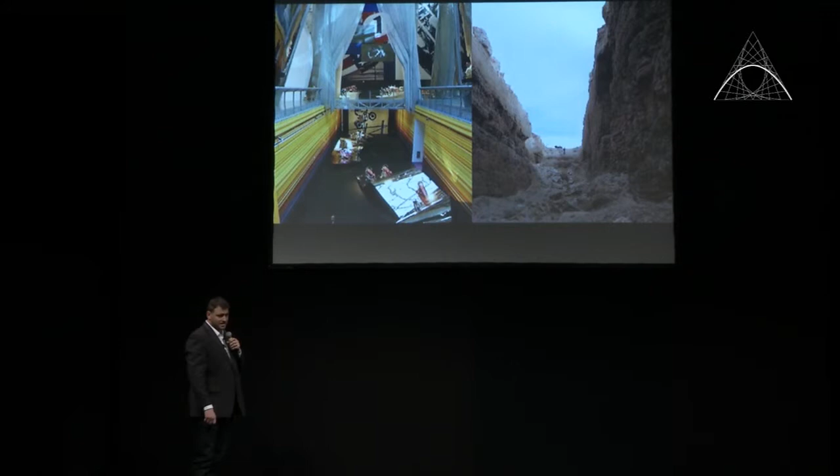We had the honor of having Rem Koolhaas design us the Guggenheim Museum in the Venetian, which shortly closed down. But here is also a land artist, Michael Heizer, that did Double Negative. Again, we look at these influences and how we can use them.

Bellagio, again, no concern for water, shows every day, every night. And yet you'll see our main body of water, Lake Mead, which has already dropped 120, 30 to 40 meters over the last 10 years.

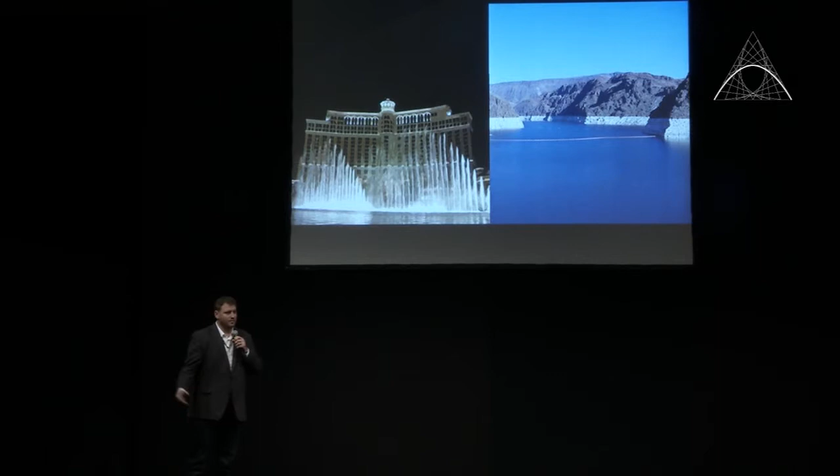Most think that the women are showgirls and that they do the entertainment, where we do have a beautiful family structure, schools, grocery stores, and all these other elements.

But the city is always about importing. And what we see is Caesar's Palace on my right, again, importing all these different elements, all these different cultures, and very rarely do we look at our own culture. Here are some hieroglyphics of Native Americans that have actually passed through here in Red Rocks and have depicted these images on the walls.

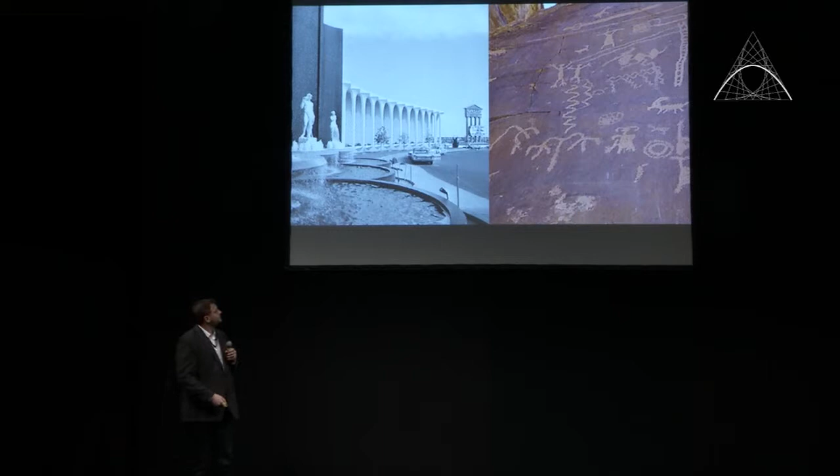So our goal at the firm is to look to that other side. What is it about our natural environment that we can use and find inspiration from?

So we take a look at a lot of the stuff that's in our surrounding context. The textures of our mountains. It's a very, very harsh environment. So even the plants we've looked at, they have these outer shells, these cactus, these barrel cactus. It's all about how to protect yourself from this hot desert sun.

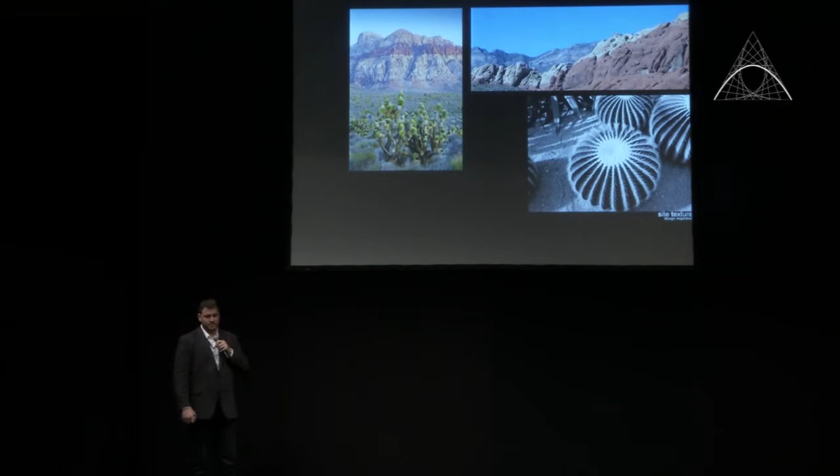And again, the bottom right image, so we're always trying to figure out how do we embrace and use both sides, the strip and our natural environment?

As you guys have known, we have St. Mark's Square in Las Vegas, we have New York, we have Paris, so we have all these different elements that we're always taking these images and bringing in. A couple years ago, we created a project called City Center, where we brought all the star architects around the world. And we still are trying to figure out if it's working.

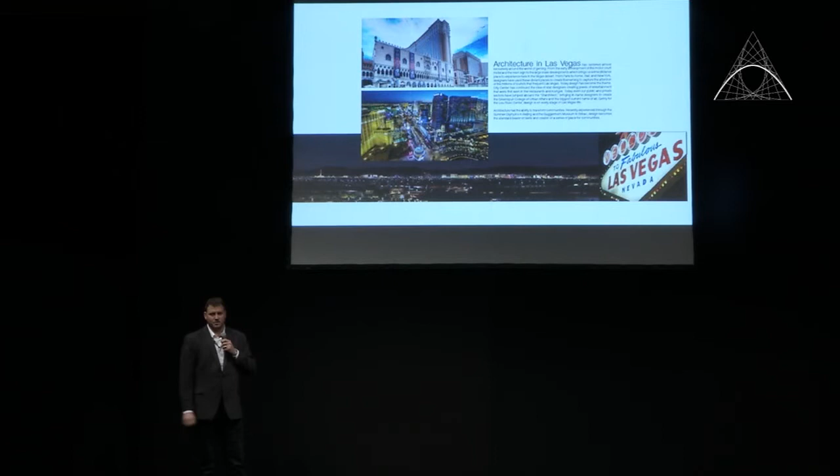But again, Las Vegas is trying to grow up. It's trying to find a design sense, and hopefully, over the years, it'll keep developing.

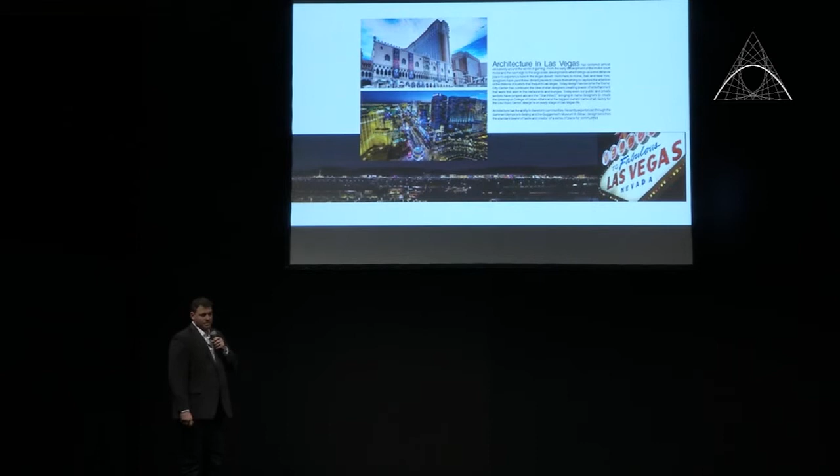But this is mostly what our housing looks like. Our firm does a lot of single-family residential, and to be quite honest, Las Vegas, this is what you get when you go through the valley. It is very depressing. The urban design is pretty poorly thought out. There's no walkability. It's all about the car. It's all about driving. And there's nothing unique about it.

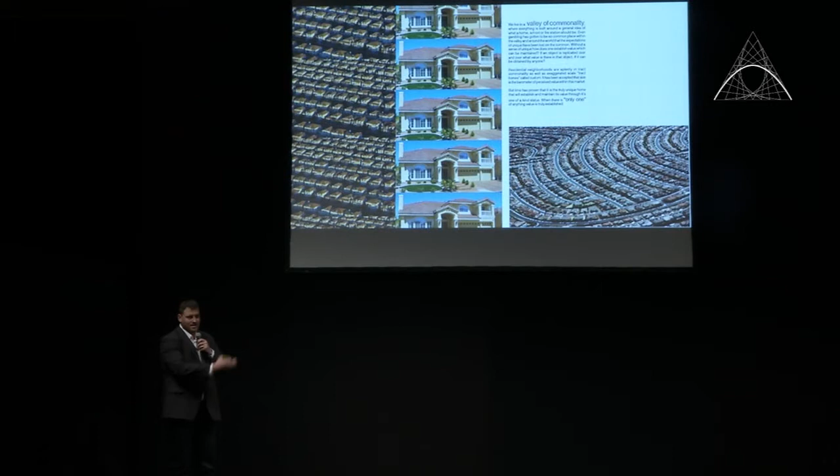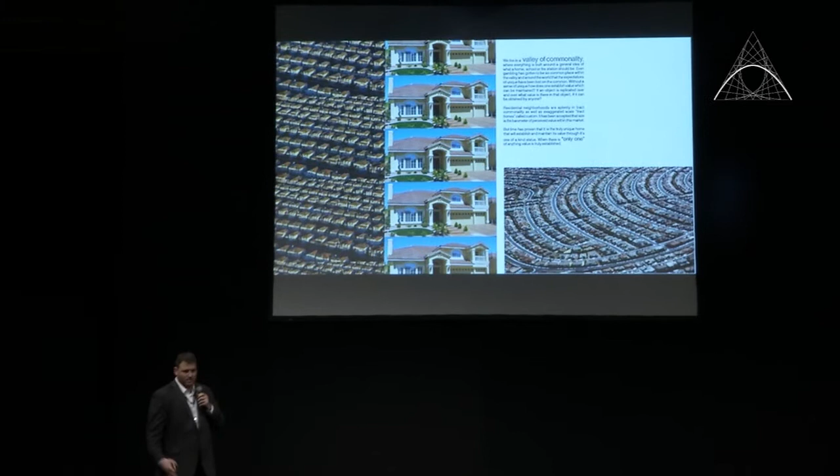And again, this is Tuscan style that, again, what did it have to do with our place? Nothing. But we would continually import all these different ideas without really knowing what they do and what they mean to our environment. So, Tresarca.

This was our first attempt to really start educating what we thought we could educate our city with, and looking at sustainable strategies on what you could do for a single-family house and how we could start to protect passive cooling systems, all these elements to really start educating our clients, our community on ideas.

So it was a very minimalist approach, and Tresarca is derived from tres, 3, and arca, which is Latin for box, safekeeping of a box. So what this project is, it's 3 separate boxes with the main second floor, which is all the bedrooms, elevated and then wrapped with a mesh.

Here in Europe, you've seen a lot of the double skins. This is something new to the States that it's starting to happen a lot more, but something we implemented on this project.

Again, site textures. These are the dry lake beds, 20 miles from the site. The textures of our Red Rock Mountains. And again, we started looking at this patchwork and how these could start to relate and become something that could be fabricated for these panels.

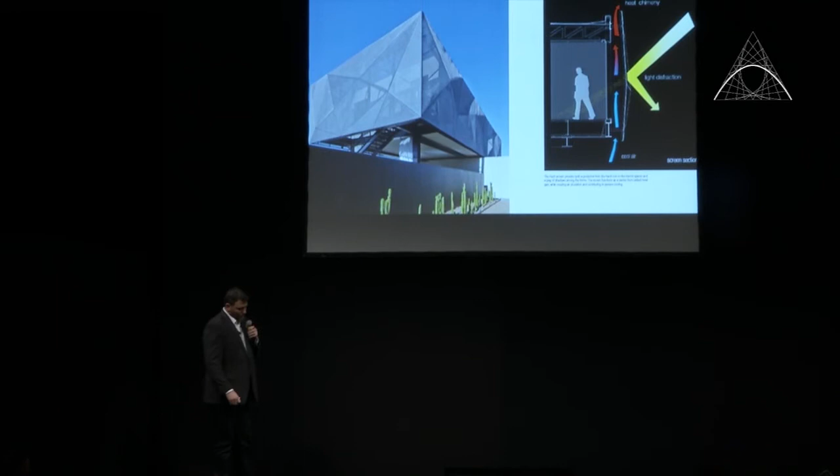So again, the second floor, we wanted to be able to create a passive system. So the mesh screen provides both protection against the harsh heat, but also creates this beautiful shadow pattern inside that we'll see later.

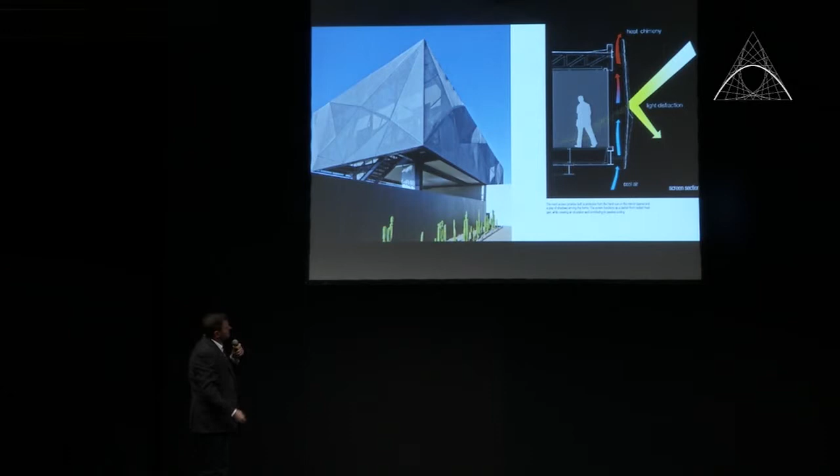The section. So again, what we try to achieve is to elevate those boxes. What we need in the desert is shade. So once we elevated that box, we started to create these courtyards underneath it. And with that top image, as you sit there, it's called big-ass fans, that air starts to circulate.

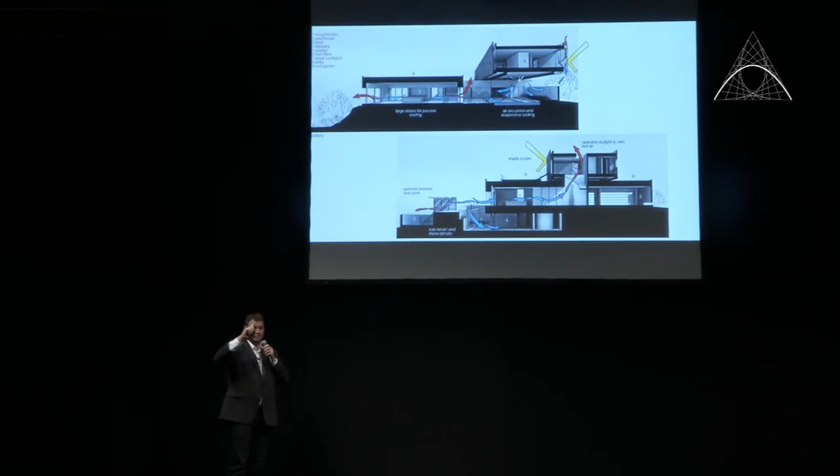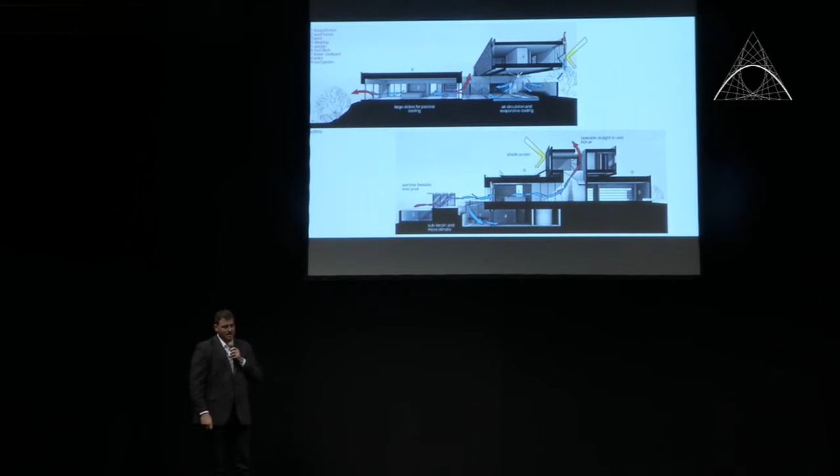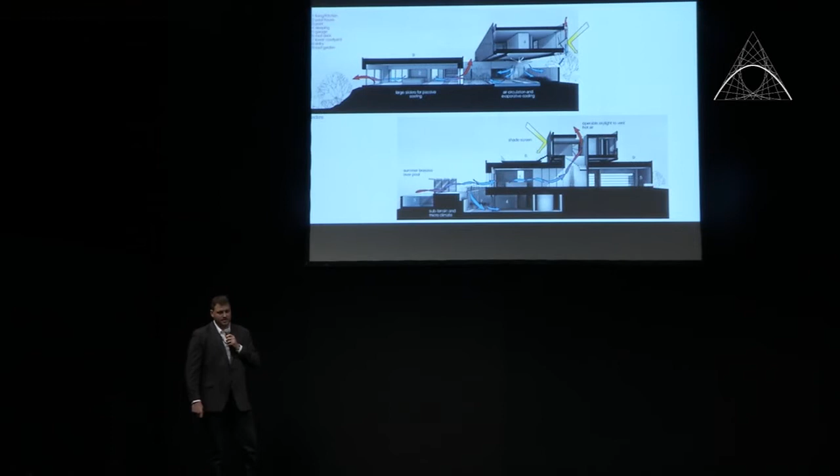And then we have reflecting pools that, again, the water comes through these pools, the air circulates, and we start to bring the temperatures down 15 to 20 degrees without any air conditioning or anything. We also believe you can live in the desert, if done right, all the time. So again, we try to tell our clients, you can be outside 360 days a year.

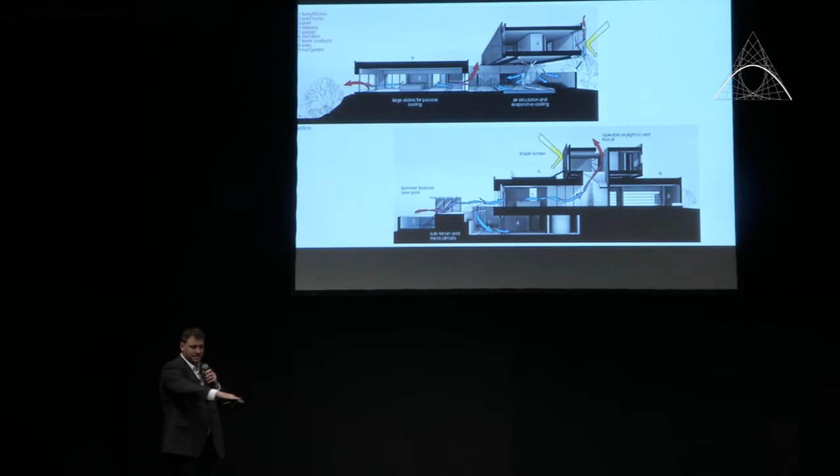So the bottom, anytime we do basements where we can go subterranean, again a lot better cooling, we'll also create these courtyards that extend out, that we can create these microclimates that cool the space. Just some process images, and again some studies of how we broke the boxes up, how we could pull these apart and create these internal courtyards.

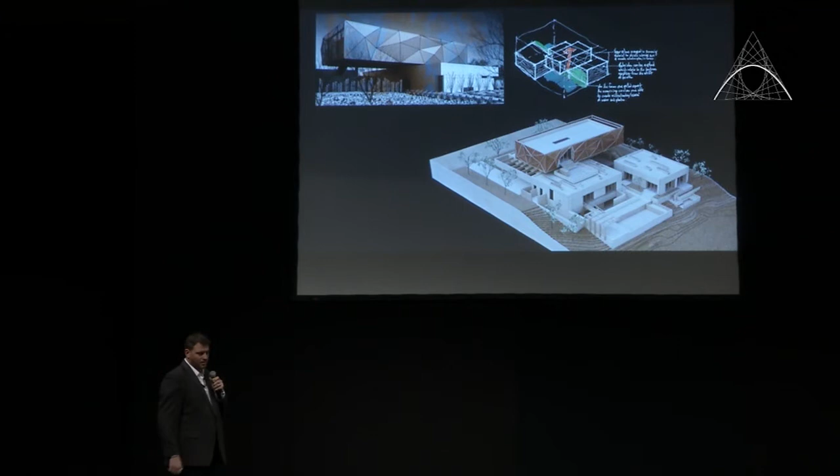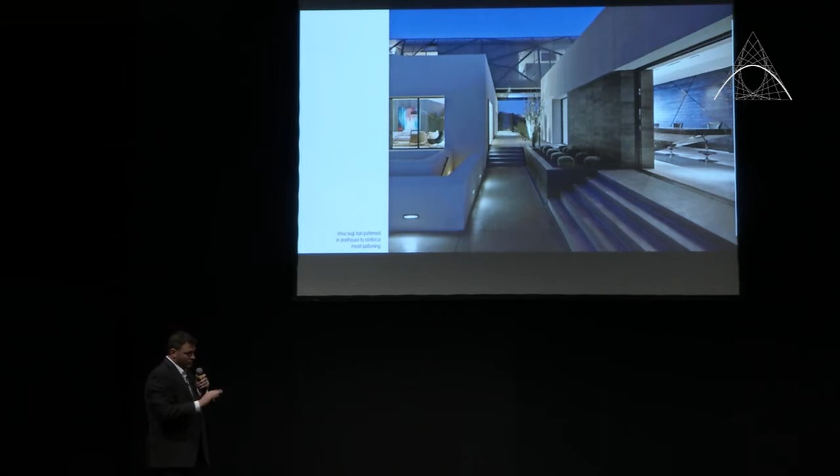Here you can see, as we separated the program, we got these really intricate little courtyards and passage and circulations. We start to use multi-sliders and start to open up the whole house. And again, we can allow all the ventilation to come through.

On the right, you can see this is the pool house, and the feature wall is called shou sugi ban, a Japanese technique where we burn the wood. And again, even the line work starts to pick up the fractured mesh, so that idea starts to come inside as well.

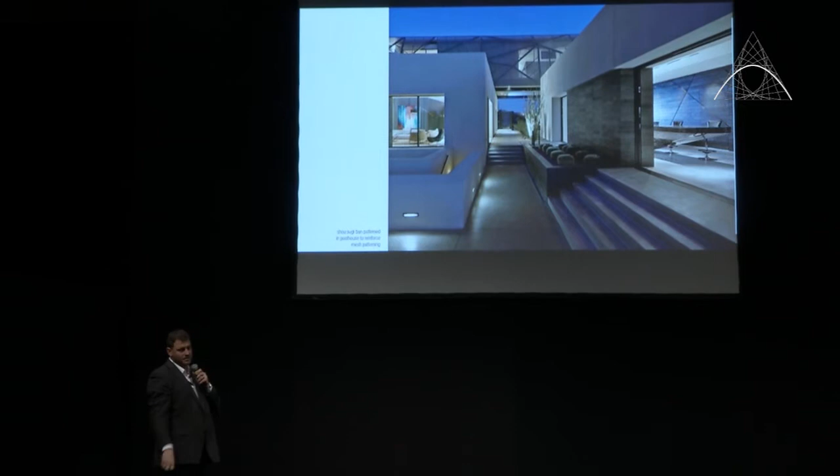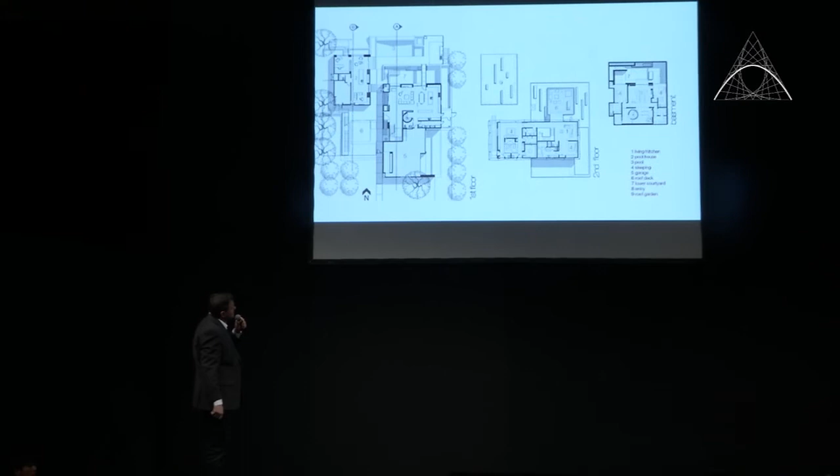The top left, that is the main floor. So again, organized in a way that we can have the central courtyard, that all the living flows into those spaces. The second floor is where most of the sleeping rooms and bedrooms are that open up to a roof deck. And then the basement is guest suites and entertainment space that open up to a subterranean courtyard.

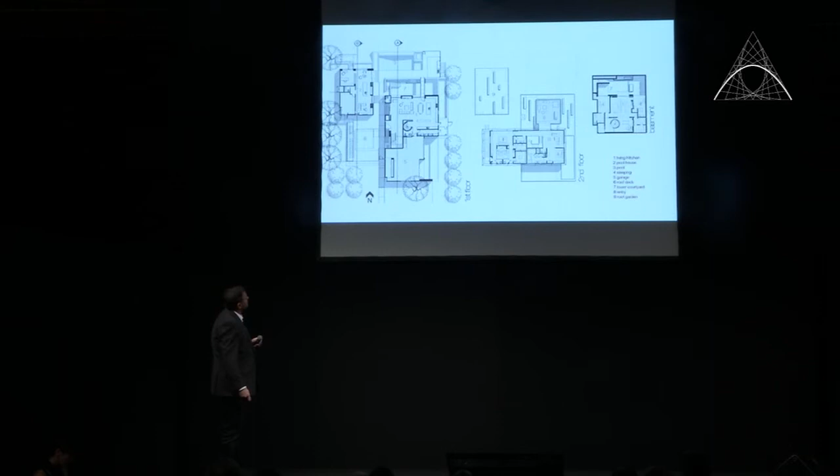Here is a look at the reflection pool inside that courtyard. Again, very zen, very relaxing spaces that we tried to achieve. And again, that reflecting pool, as the air circulates over the top of it, we start to cool that courtyard.

Here's an example of that sunken courtyard, where again, all the rooms can open up to that courtyard. We create that microclimate where, again, the breezes, a small water feature, everything starts to help cool that space down.

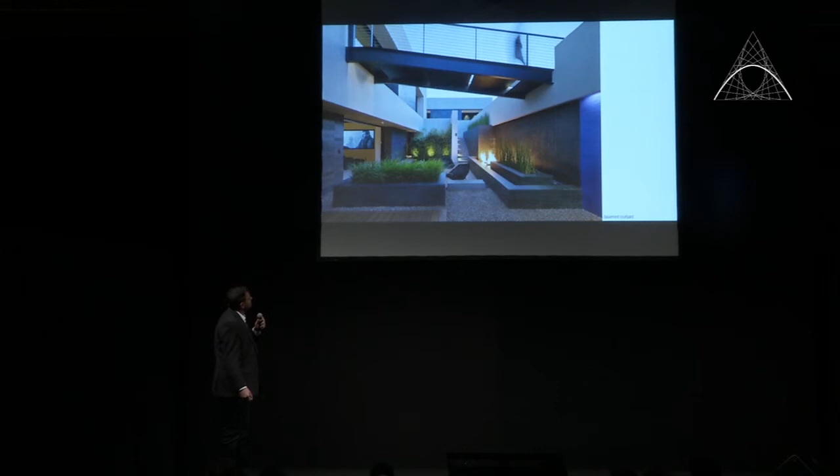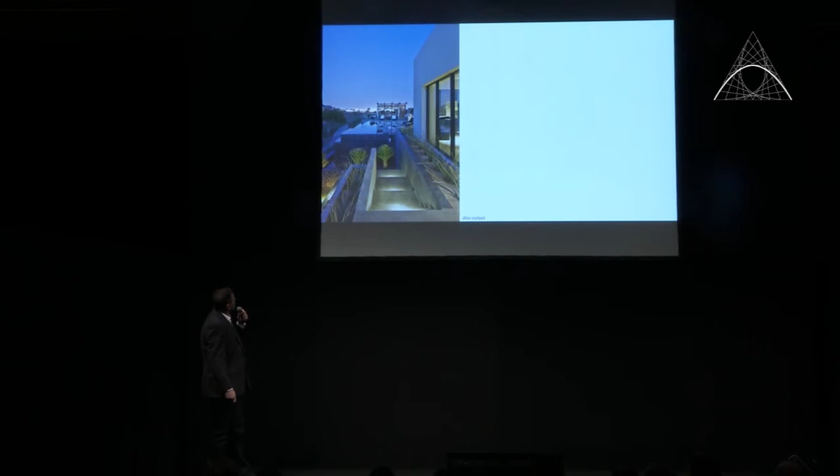This is just off the office, a side private courtyard that, again, looks back to the Las Vegas Strip, pay a little homage to that. It is on a golf course setting, but our goal was to screen that as much as possible and, again, look back towards the mountain area.

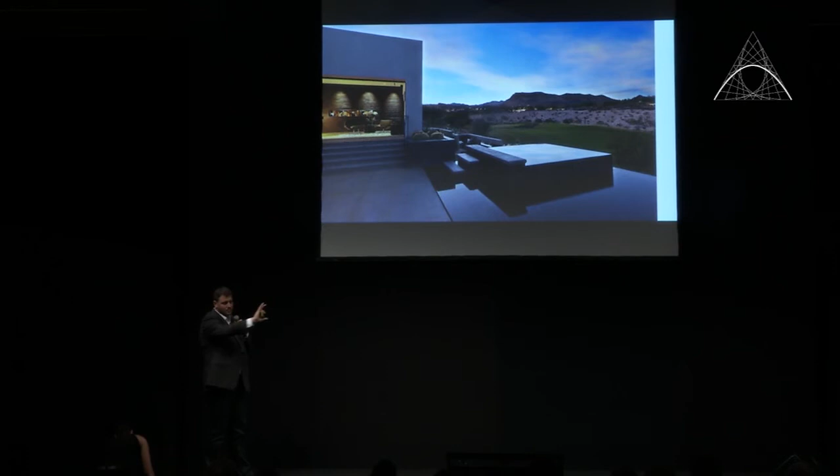Again, you can see how the house opens up and extends. Here's another picture of the courtyard. We use pretty simple materials. It was plaster, blackened steel. The mesh around it was a woven wire mesh that is galvanized to prevent rusting.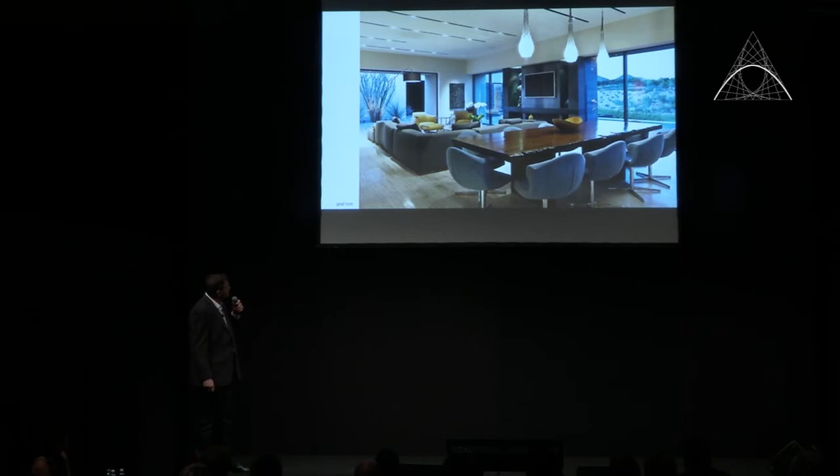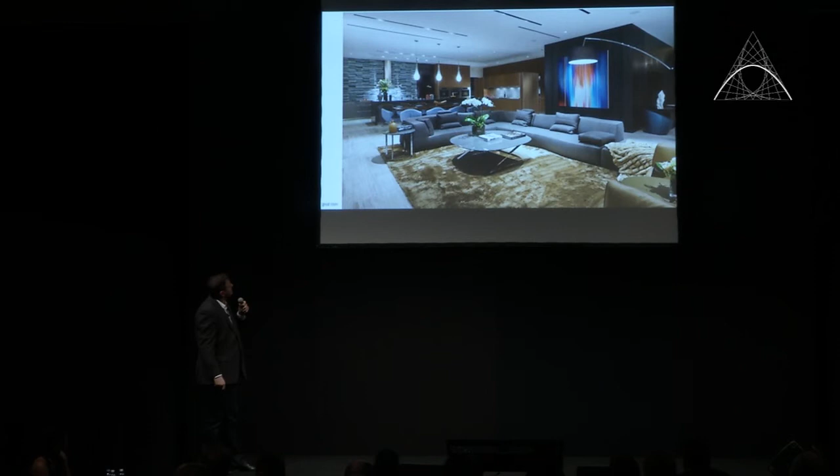We'll bring the steel elements back inside. The top right is a blackened steel finish. Bulthaup kitchen.

This was a very interesting art piece. Anna Canuel, which is a light sculptor from New York, we approached her and showed her that we had this possibility to do a two-story element around the main staircase. This is an installation over 16,000 light bulbs. Only about 200 are operable. But as you come up from the main floor, you come up and experience this all the way around it. Very beautiful piece.

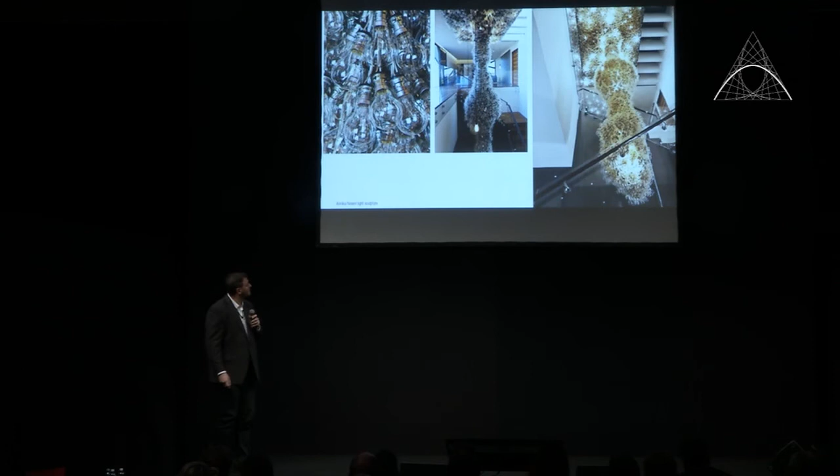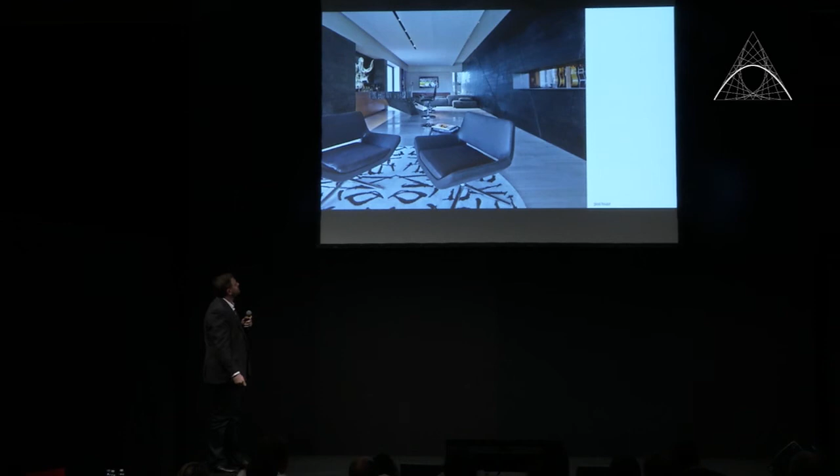This is the pool house again, and that was that shou sugi ban wall. And again, the lines of the mesh start to pick up, we try to make this cohesive element that makes these details happen indoor and outdoor. More of a detail shot of that.

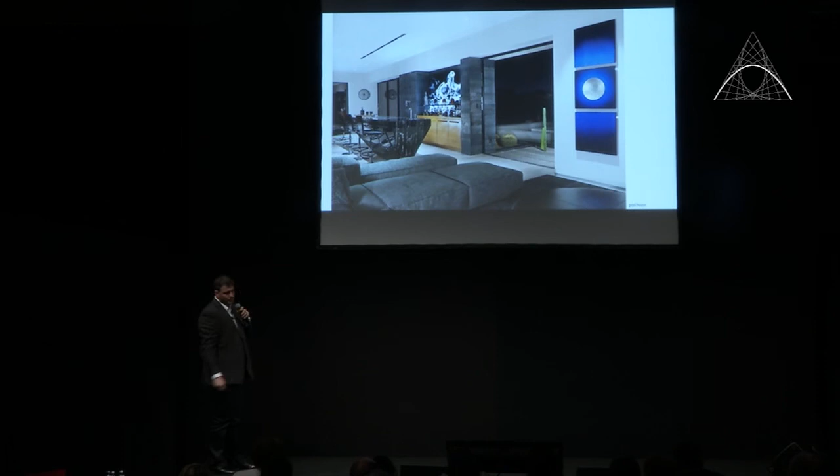Again, the multi-sliders opening, bringing indoor and outdoor together. This is more of a day shot, though, that you can really start to see the patterns and, again, how that mesh and those shadows play against the form.

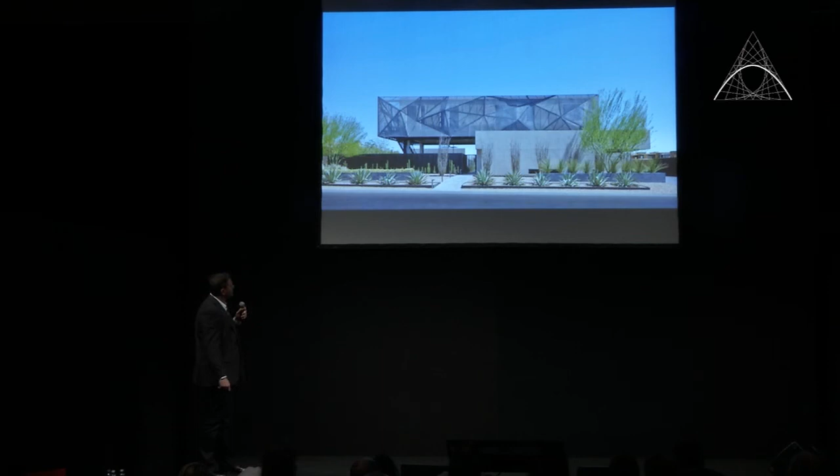Very simple, drought-tolerant landscape, all used in the southwestern region. Agaves, ocotillos, regal mist, palo verdes.

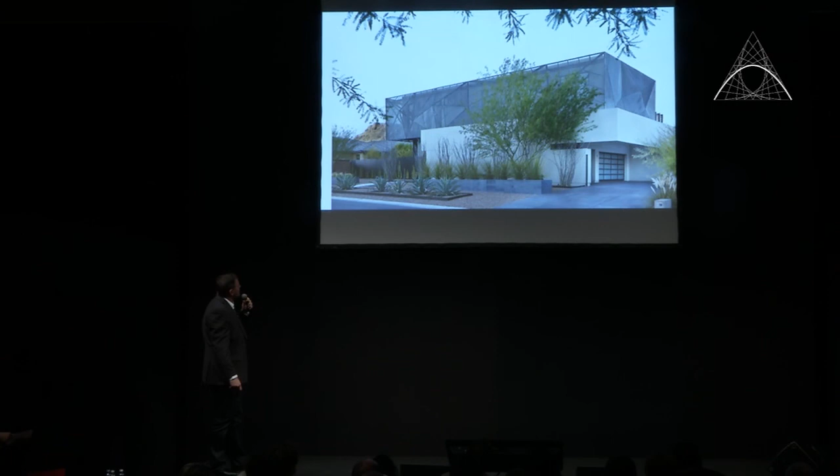This is the backyard, pool, and that courtyard and the pool house beyond. Sculpture garden. And that is the perspective of the front of the house. And that is Tresarca. Thank you.